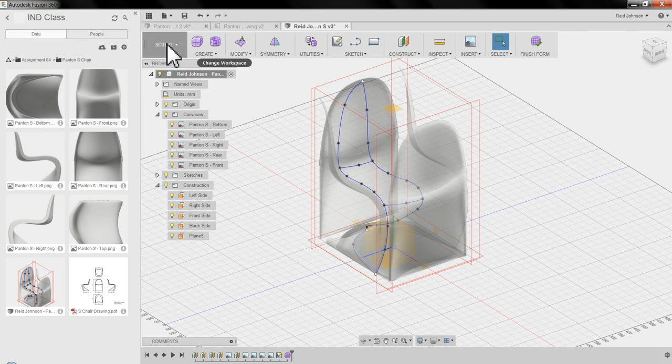Now that our sketches are complete, we can go into the sculpting environment. To do that, we click on the Create Form button on our toolbar. Now we enter the Sculpt work environment. We've left Model and gone up to Sculpt, and we want to go ahead and use the Create button.

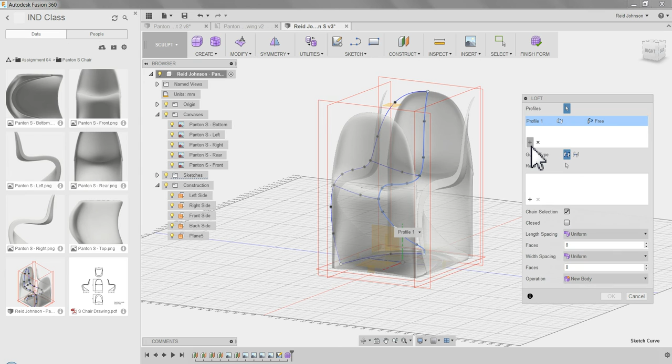We're going to try a loft. The first step is to select our first profile, which is the center of the chair. Then here in the loft toolbar there's a plus sign. Click on that, and now I can click the left side, that's the left profile. You can see immediately Fusion 360 connects the two, the center and the left side.

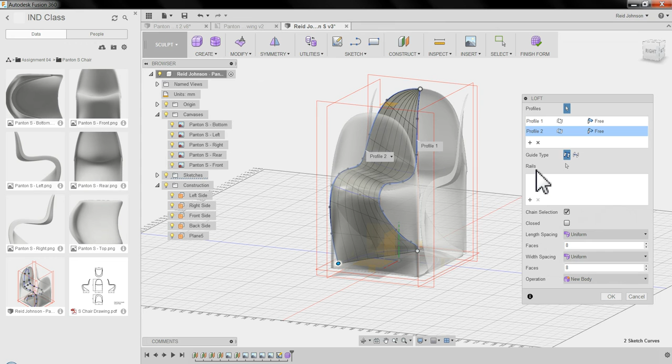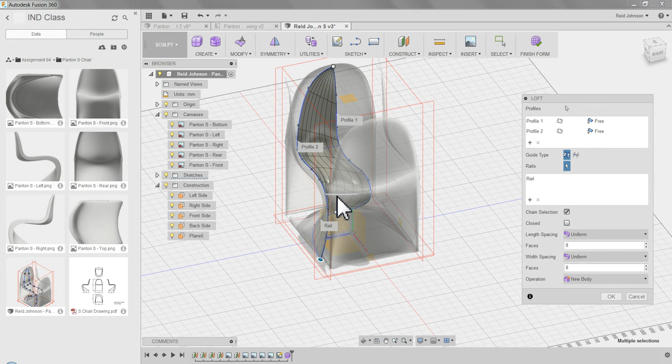We're not done yet. We want to add our connector sketches, which are called rails. Under rails, I want to select the rail at the base of the chair. Notice how the two profiles are connected following along this rail, or sketch guide. Now I can add additional rails. I'll click the plus sign again for the one at the front of the chair, and one more time for the rail at the back of the chair.

So now our two sides are connected, using these rails and profiles. They're all labeled here in Fusion so you can understand what is what.

Now a couple things we can change. First off, the length spacing. We've got 8 faces, and that's a lot across here. We can do perhaps 2.

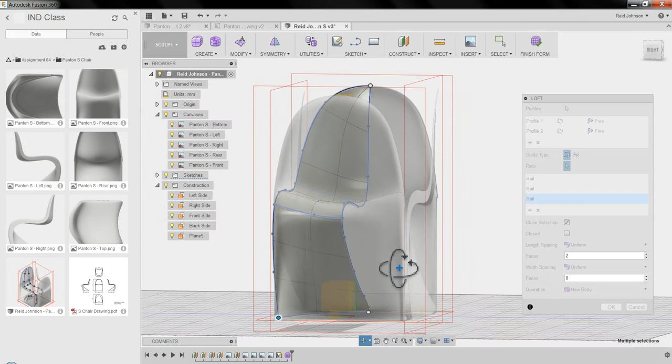See that change there. Then the faces going the other direction, there are 8. I'll zoom in here a little bit. You can see it doesn't follow the lines exactly. If I change this and try 14 first, that's going to get it a lot closer, but now I have a lot more to work with. So I have to decide how closely to follow the line versus how many I want to work with.

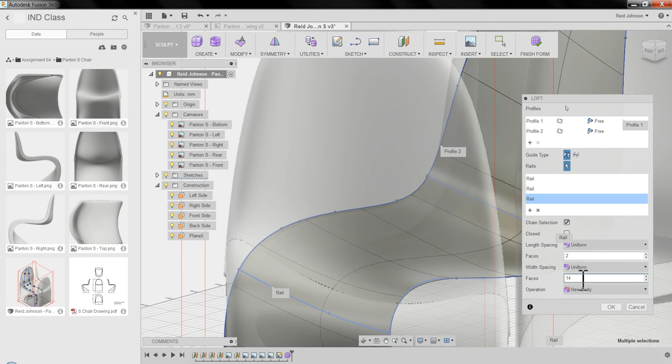I'm going to go ahead and do 10 for this example. Alright, that's looking pretty good, like half of our chair. I'll go ahead at this point and say OK, and there it is, half of our chair.

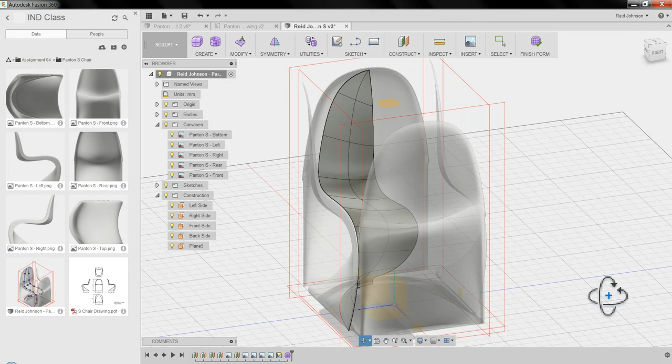I'm going to turn off our canvases so we can see just that portion, and I'm also going to turn off our construction planes for now. Here's half of the chair.

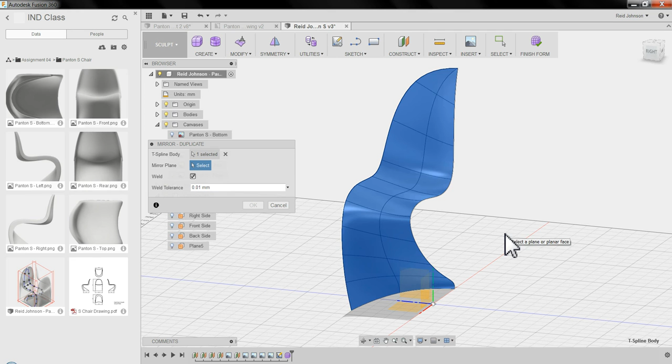The next tool I want to use is Symmetry, and I want to mirror duplicate. It asks me which T-spline body to duplicate, so I select our half of a chair. Then the mirror plane. When I select that, it was critical to draw this center profile along the center work plane so that this mirrors across perfectly. Click that.

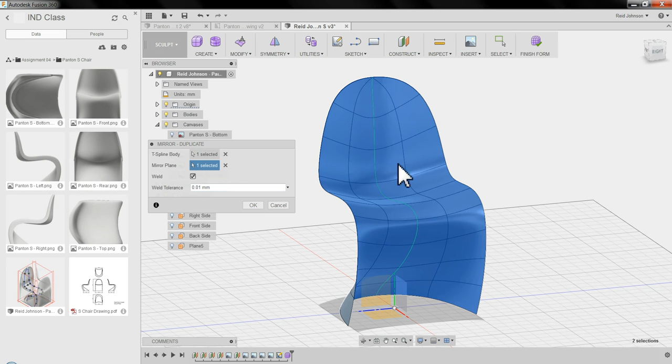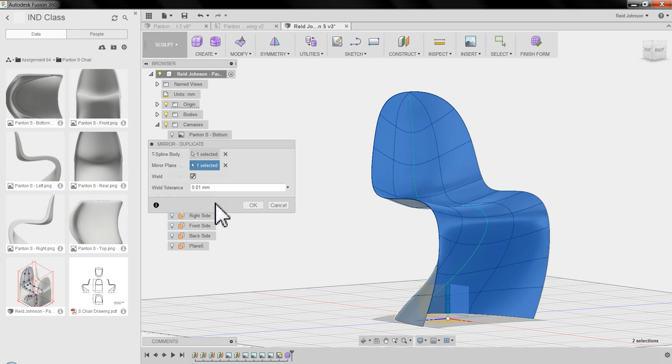I'm going to go ahead and say OK, and here is our sculpted chair. You can see it here.

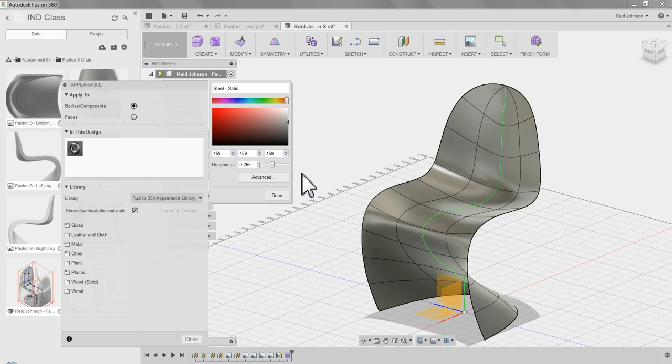Go ahead and go into Appearance, and I can adjust this material. I'm going to edit this material. This isn't required, but I want to show how smooth these curves are. If I change my roughness down to 0 and say Done, close, I'm reflecting the room I'm in, this warehouse type environment. You can see it reflected behind us.

And those curves are looking really nice, clean and tight there. And that's it.